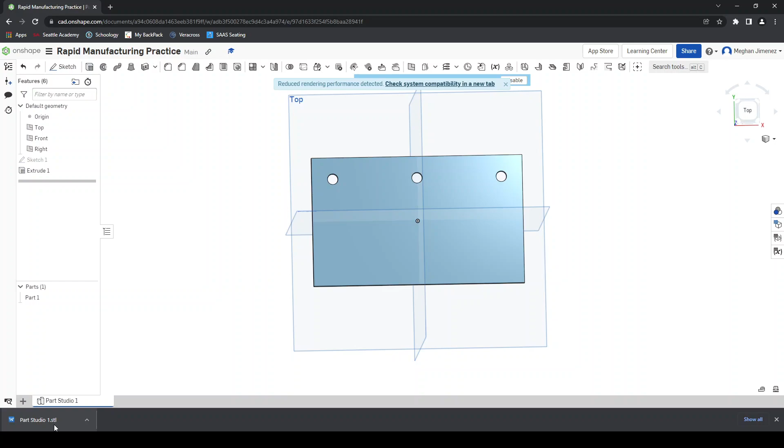Now, let's talk a little bit about laser cutting. For laser cutting, we need to generate a two-dimensional file because we are going to be taking a flat material and cutting out a path on that flat part that already exists. We're just going to be drawing on it with a laser, essentially. So we need to make that drawing for it.

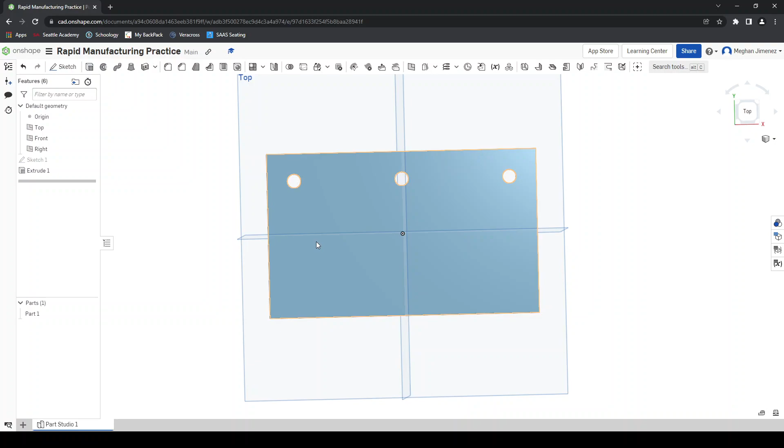So the way that we're going to do that, I'm just going to hit this so that notification goes away. The way that we're going to do that is we're going to pick a flat side of our drawing. I'm going to go to sketch, and I'm going to click on here, and I'm going to make a new sketch on the face, okay? And then what I'm going to do is make an offset.

So the reason we have to make an offset is because there is something called kerf. Kerf is basically the width of the laser. So as the laser goes around cutting on the line of whatever drawing we make, it is going to cut away additional material because the laser has a thickness. So when we make this drawing that the laser is going to cut around, we need to account for that thickness. Now, sometimes that kerf doesn't really, quote unquote, matter, right?

If it doesn't need to be a super precise fit, it's something that is a little bit negotiable. However, if you're trying to get two pieces to fit together perfectly, that can matter. So we need to make our line offset to account for that.

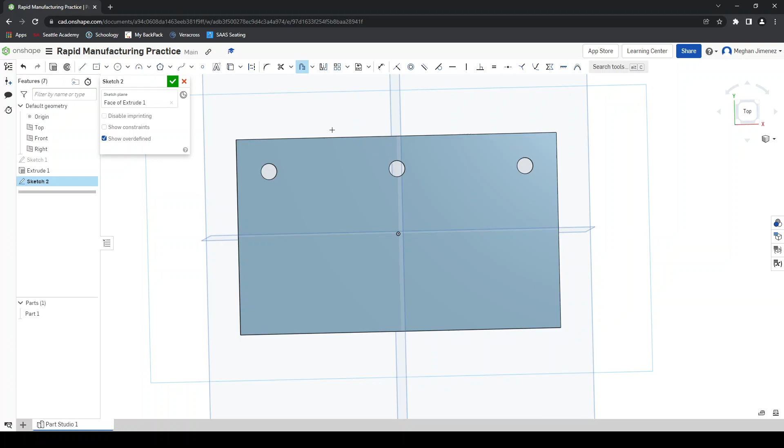So right here, there is this offset tool. You can see as I hover over it, it says offset. And so I'm going to click on each of these outside lines, and you see how it generates a new line that goes inside? Now we want this to, instead of going inside, go outside. Because we want to think about how the laser is going to be, so it has a thickness, it's going to go around. If it was inside, it would cut away extra of our part. We want to go outside.

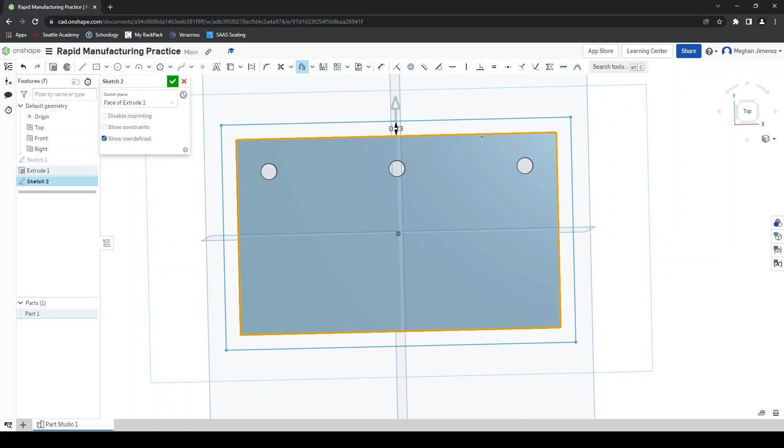Now I'm going to come here, and I'm going to set the kerf, and I want it to be 0.003 inches. It's really small, but like I said, if you're trying to get something to fit perfectly, it matters. So we want to set it.

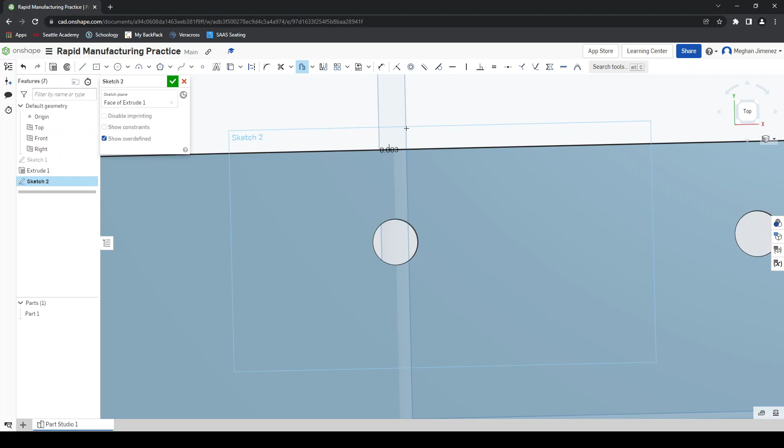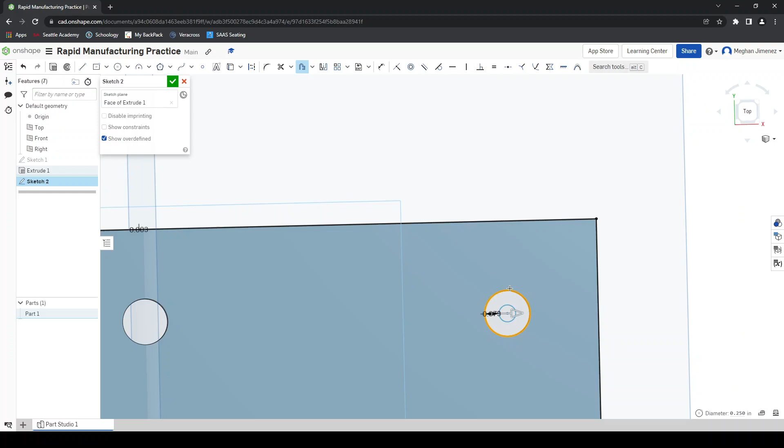If you zoom in, you'll see there are two lines here. For things on edges, you want the offset to go outside. For cuts that are inside a piece, you want it to go inside. I'm going to go in right here, so it's inside. Think about how the laser is going to go around. If it was right here, you'd be cutting off extra material, so you want that curve, that offset drawing, to go inside.

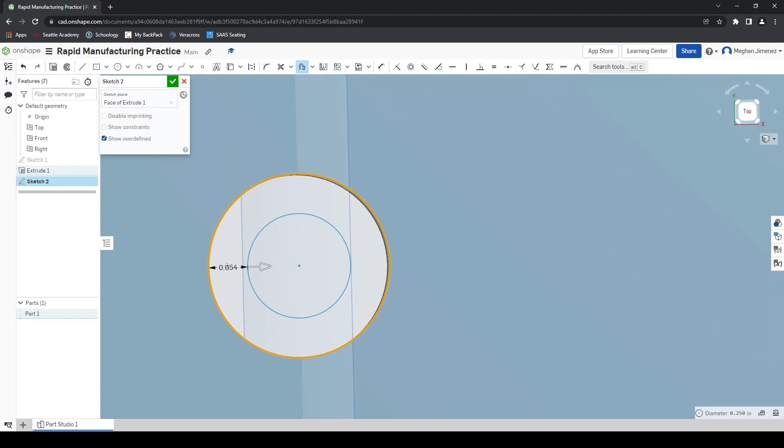0.003. Again, if you're zoomed in, you'll see that it is inside. Lasers are thin, but they're not infinitesimal, so we have to account for that as we're making these drawings. Switch it to the inside. 0.003.

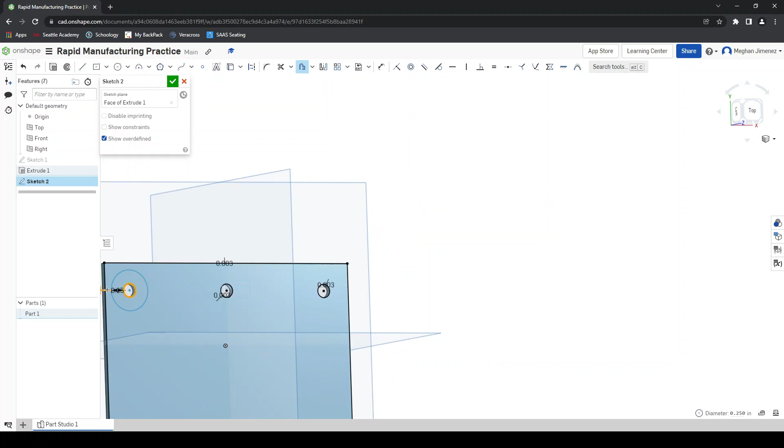Do it one more time. Oops, sorry, I've anchored it. I've gotten on this weird angle. There we go.

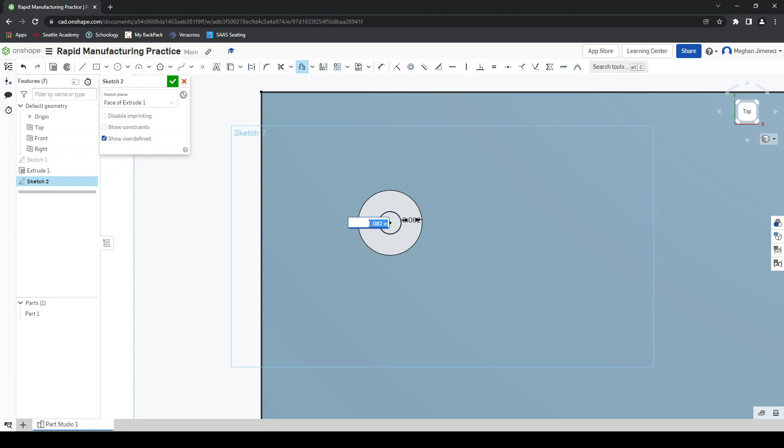0.003. All right, so now I have all of those lines redrawn. You can see with that offset tool, it's really not that bad. If you do have a super complex drawing, it can take a minute, but even then, because you're only doing the outside edges, it usually doesn't actually take that long.

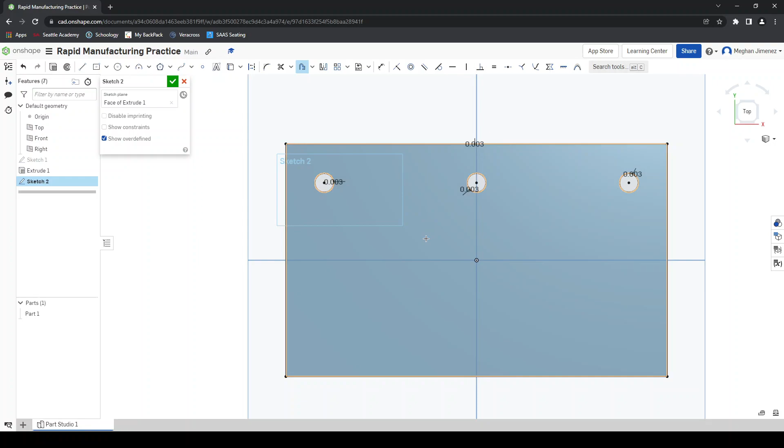When you're all done, press the check mark, and you can even rename this as like 'laser cut sketch,' so that it's super clear and you know what that is and you don't accidentally delete it. Once you have this drawing, we need to put it into a new type of file.

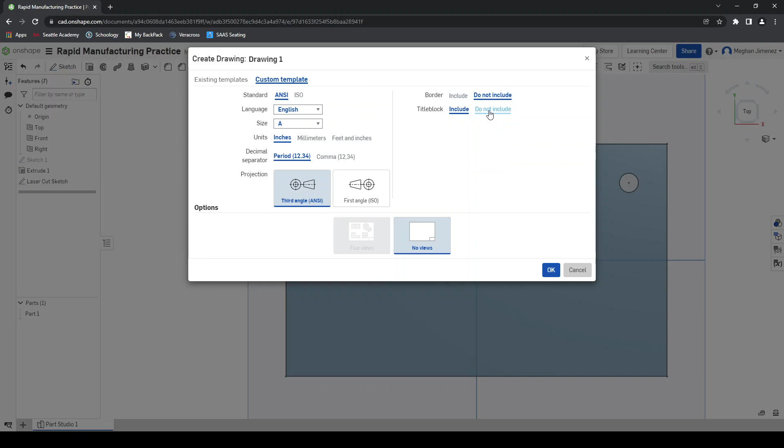So we're going to press the plus, and then create drawing, and go to custom templates. All the ones they have aren't quite right. What we're going to do here is say that we do not want to include a border and we do not want to include a title block, so it's going to make this blank thing for us.

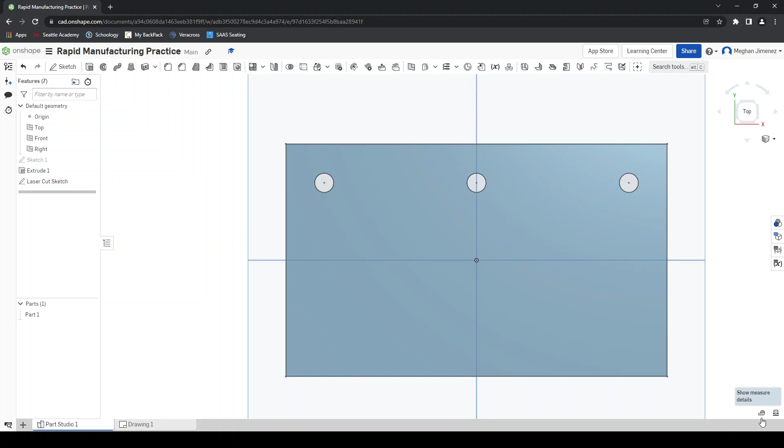Now, this is 8.5 by 11, a normal standard size piece of paper. If I go over to my Part Studio - also, if you don't know that this is here, this is your measure tool, you can click on it. I know that this is 3 by 5, but if you don't know the size of your thing, you can double check it. So this is 3 inches by 5 inches, right? It's that little extra bit bigger because I'm measuring the drawn lines rather than the actual size of my shape.

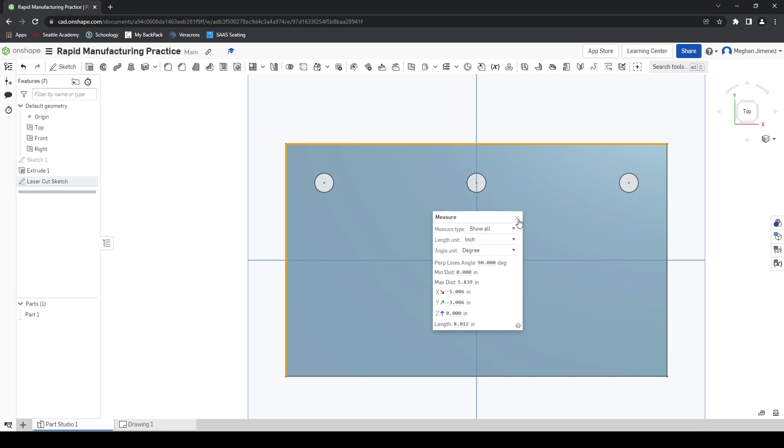So we want to make this drawing just a little bit bigger than that so that we don't have this whole huge piece of paper. That's going to make it easier for me to fit a bunch of different drawings on the laser cutter at the same time.

So I'm going to right click - to open this panel, I click these multiple sheets of paper, right click on sheet 1 and press properties. I'm going to change size to custom, and since it's 3 by 5, maybe I'll make it 6 inches by 4 inches, since it's 5 across. So now it's about the size of my thing - it doesn't have to be totally perfect, but there's a little bit of wiggle room for me.

And then what I'm going to do is click right here, insert view. I need my view scale to be 1:1 - we want it to be the correct size. If you do 2:1 or 1:2, it's going to be either double the size or half the size, which is presumably not what you want.

And then I'm going to press insert. Right here, this one is going to import your part, which is not what you want. We want to go to sketches, and then choose your laser cut sketch - see why we labeled it? This is why we label things. And then you're going to bring that down here and plop it on.

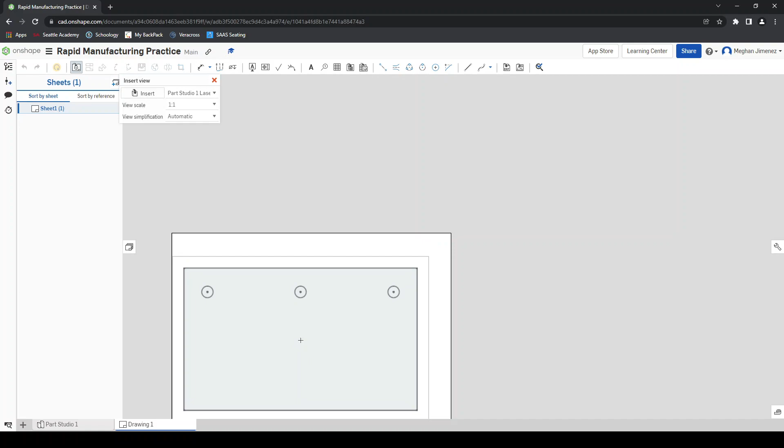Ta-da! Look at that, it's beautiful. So this is the path that the laser is going to follow. Hopefully this makes sense now what we were doing. From here, what you're going to do is export as an SVG - that's all you need to do.

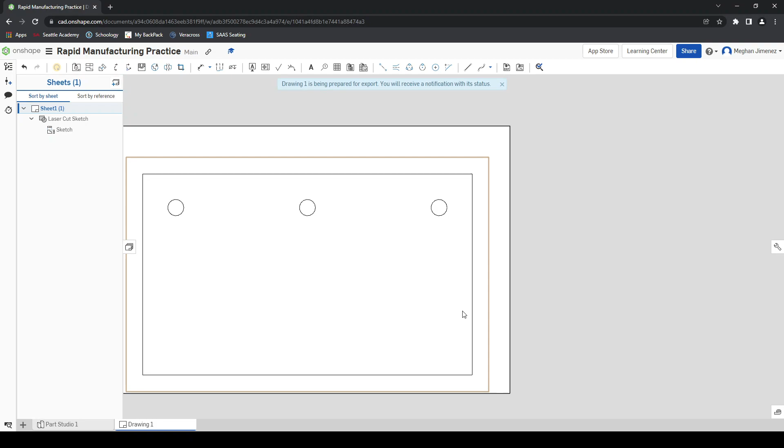And press export, it'll download, and then you submit this to the laser cut form. And that is how you get your parts made through rapid manufacturing.